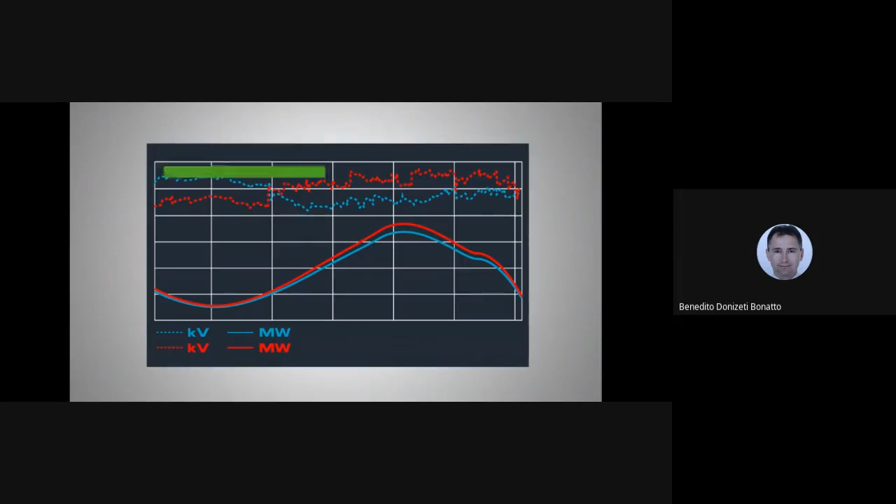The loss reduction improvements from VVO were small but valuable. Analytical simulations were performed using modeling, and simulation analysis determined that there is a potential for a loss reduction for the peak hours at most substations. A number of EPRI Smart Grid demonstration projects focused on technologies that exist on the customer side of the meter.

ESB Networks conducted a customer behavior trial to gauge the potential for smart meter-enabled treatments, including time-of-use prices and energy information services, to change customer energy consumption and peak demand usage. The time-of-use rates, energy information services, and financial incentives were found to reduce overall electricity usage by 2.5% and peak usage by 8.8% for the one-year period of the trial.

Another area of critical importance for the smart grid that has been studied in the program is cybersecurity. Smart grid technologies are introducing millions of new intelligent components to the electric grid that communicate in much more advanced ways than in the past. Cybersecurity is exceptionally important because the bidirectional communication and the control capabilities in the smart grid enable an array of new functionalities and applications. EPRI is providing guidance to utilities on developing an overall cybersecurity strategy, developing a risk assessment and management process, and selecting and tailoring cybersecurity requirements for the electric sector.

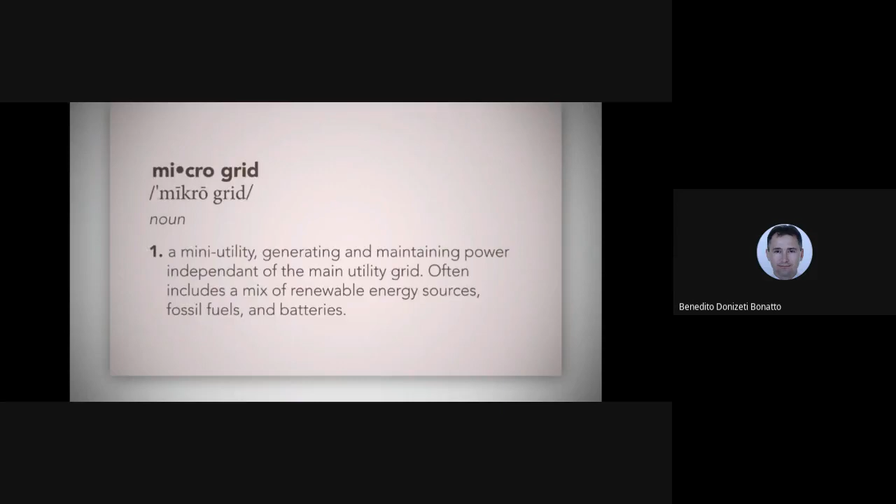Smart Sacramento projects also include energy storage, electric vehicles, customer service initiatives, demand response, renewable energy, and microgrids. Smart grid technologies allow SMUD to manage these distributed energy resources from a central point, a virtual power plant. New terms are entering our vocabulary like demand response and microgrid. Demand response programs enable customers to voluntarily reduce their electricity use during times of peak demand or emergencies. A microgrid acts like a mini utility, generating electricity and maintaining power independent of the main utility grid during outages. Microgrids often include a mix of renewable energy sources, fossil fuels, and batteries.

Smart grid technologies allow SMUD to manage these resources so that they work together, making the grid more reliable, while giving our customers tools to make better informed decisions about their electricity use, while helping to protect the environment through better use of resources. SMUD has been at the forefront of change in the utility industry for more than 6 decades. As the energy landscape shifts, SMUD continues to meet the ever-changing needs of its customers while leading the way to a renewable energy future. You and SMUD, powering forward together. For more information, visit smud.org.

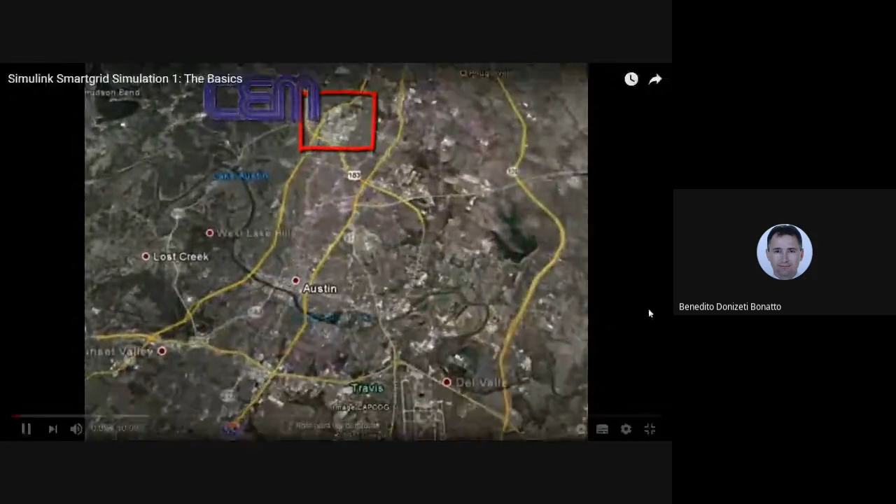Welcome to Austin, home to the Center for Electromechanics of the University of Texas at Austin, and home to the Pecan Street Project, a City of Austin smart grid demonstration initiative. This is the new Mueller community in Austin, where said smart grid is currently being implemented. The rest of this video will show you how Simulink may serve as the modeling platform for the researchers involved.

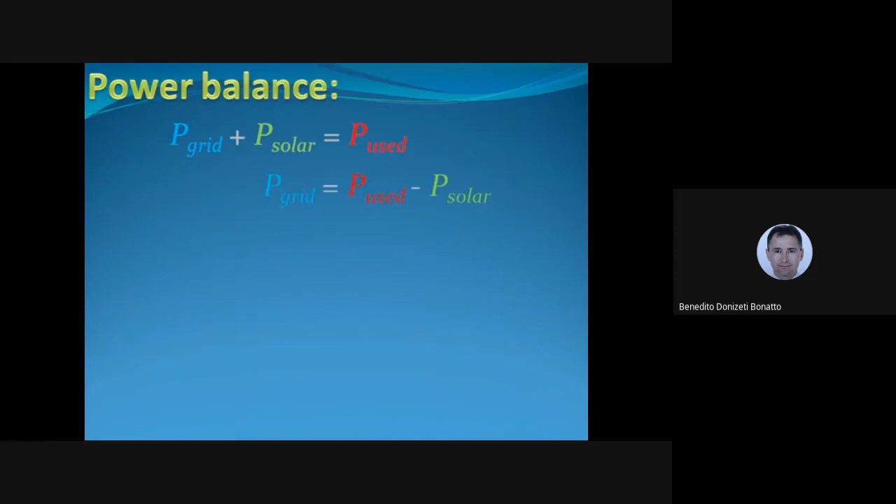The power used by homes comes from either of 2 sources, the utility grid or roof-mounted solar panels. The relationship between these sources and a home's consumption can be described as shown here. The Pecan Street project is currently measuring this field data. Here's an example that shows what these measurements look like for a 24-hour time span.

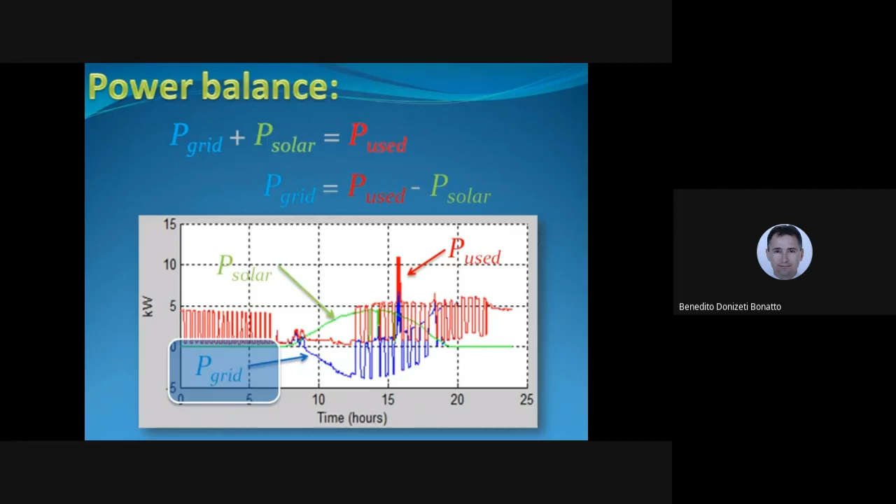What is currently of interest is the impact that variable solar generation together with home consumption have on the utility grid. Therefore, the immediate simulation focus will be on the utility grid power demand and its direction. As shown here with the blue trace, the grid power can go back and forth between positive and negative. This means that homes are capable of being self-sufficient and of injecting power back into the grid.

Referring back to Mueller, let's say we have a substation transformer, a cable here, a residential transformer here, one neighborhood here, another one here, and the rest of the system. Let's see how we can model this baseline system using Simulink. This is a simple Simulink model that can be used to simulate a few homes at Mueller. The first thing that should be noticed is that the simulation time must be entered in units of seconds. Therefore, to simulate 24 hours, one must enter 86,400 seconds.

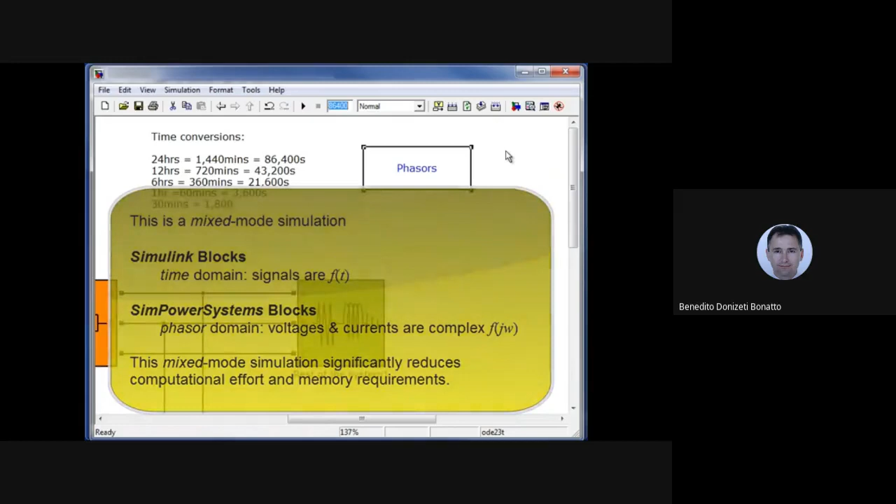The reason we choose a phasor type of simulation is because to simulate 24 hours of data, this will only take a few minutes. If we would have chosen a time domain simulation to simulate 24 hours of data, not only would we deplete our computer memory and storage, but it would also take several hours to conduct the simulation.

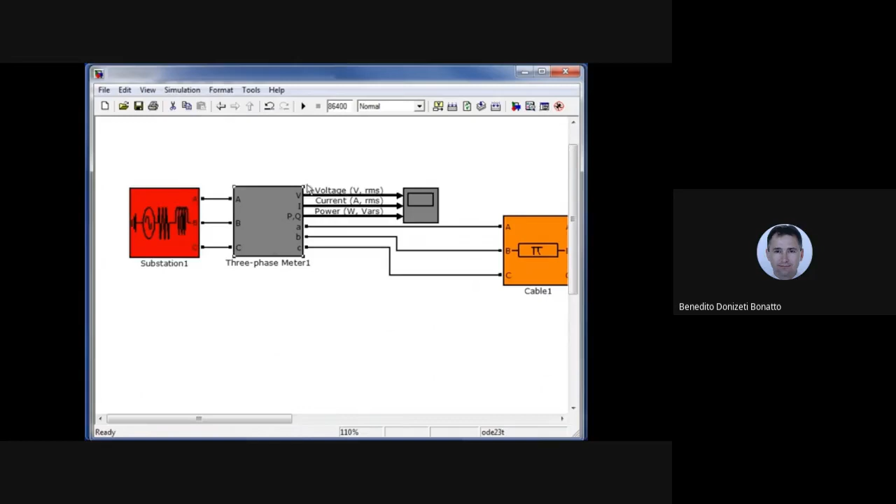Let's go over each one of the blocks shown here. On the left, we have an ideal source. This ideal source is supposed to represent the output of the substation transformer at a given voltage and frequency. This is a meter that is placed here to measure three-phase voltage, current, and power. The results or the output of this meter will be sent to this scope shown here.

This is a cable block. This is taken from the SimPowerSystems library, and it is a three-phase pi section line used as a cable here. The frequency and length can be specified or changed. The rest of the system is modeled as a simple static load where the terminal voltage is specified as well as a desired or intended power consumption.

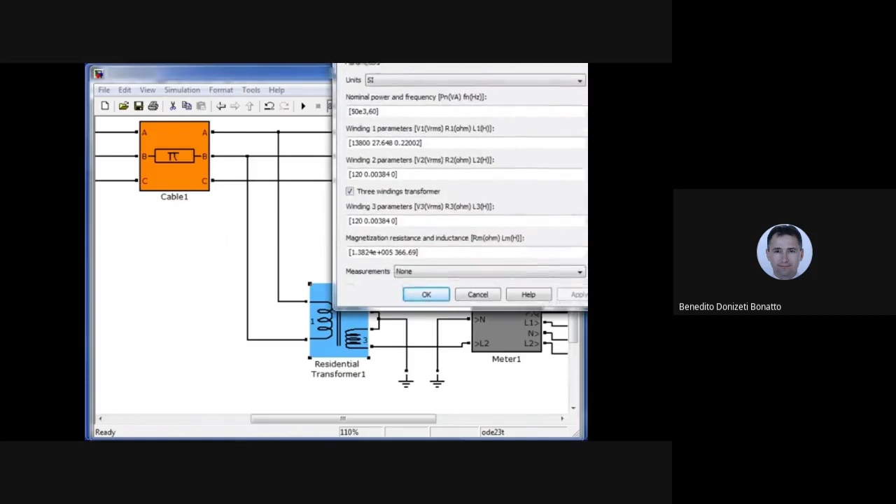This is a residential transformer. The transformer currently is set to be 50 kVA, but this can be changed at any time. The secondary side voltage is set to 120 volts, the primary to 13.8 kilovolts. These numbers can change at any time.

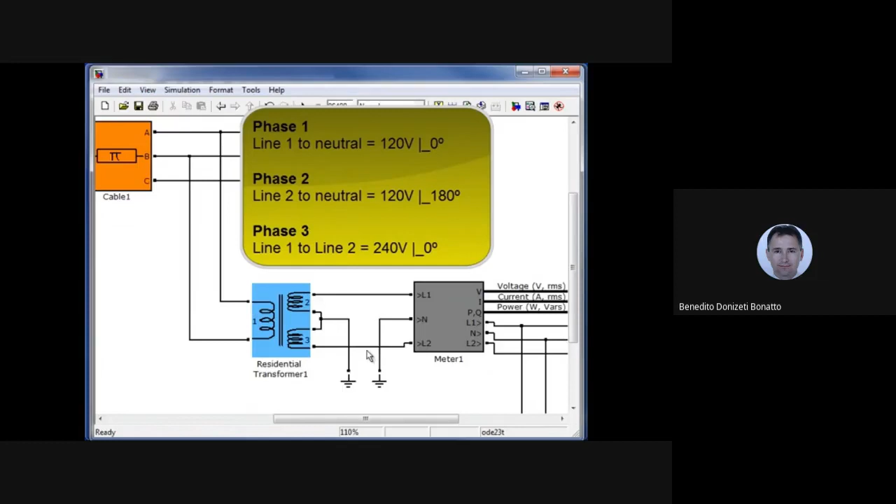The secondary part of the transformer is center tapped. This means that there's a phase that goes from line 1 to neutral or ground, and a second phase that goes from line 2 also to neutral or ground. The third phase is between line 1 and line 2, and this is 240 volts. This is another meter that is purposely placed downstream of the transformer to observe the transformer throughput. The transformer throughput will be displayed on this scope shown here.

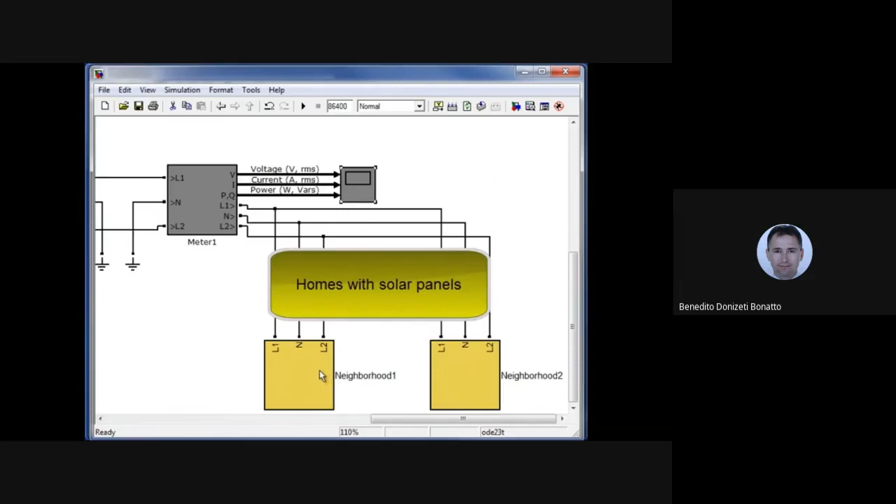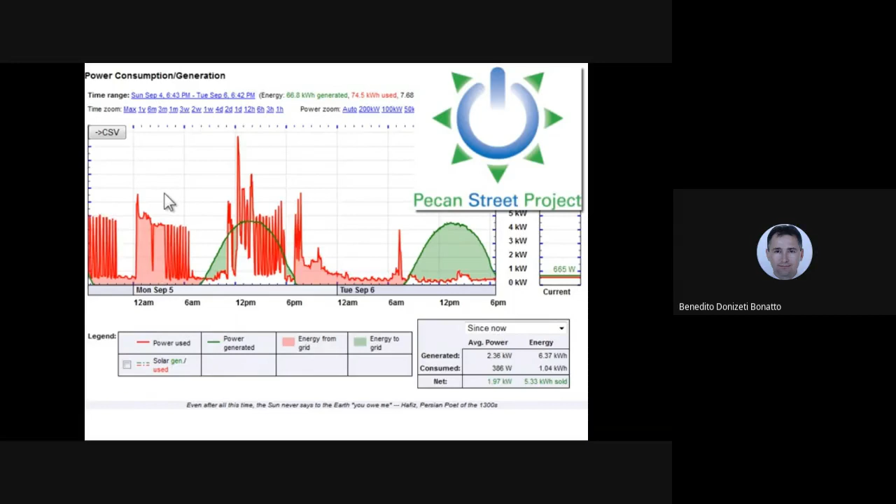These are groups of homes called neighborhoods. Let's look inside neighborhood 1. Neighborhood 1 consists of 5 homes, homes 1 through 5. Each home is modeled as a load profile. The data that drives each home comes from this source block shown here. The data that enters this source block comes from the eGauge website. The data from the eGauge website has solar information as well as house consumption information. This data can be exported in intervals of 1 minute.

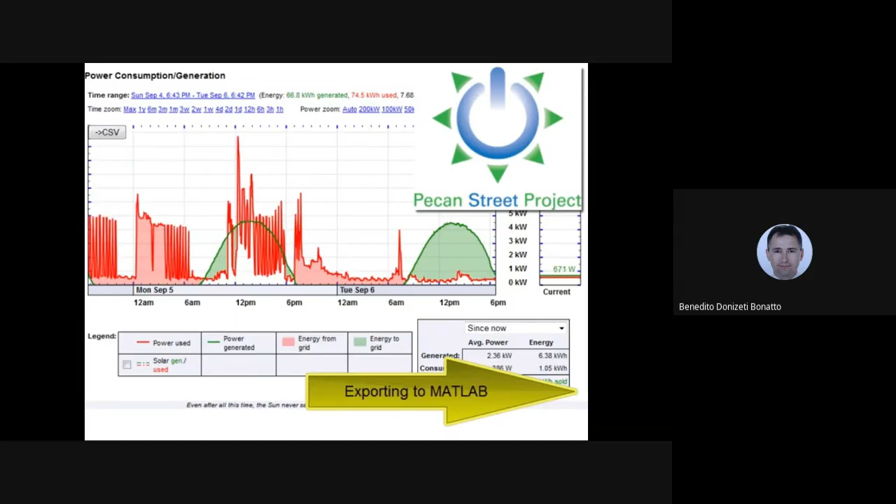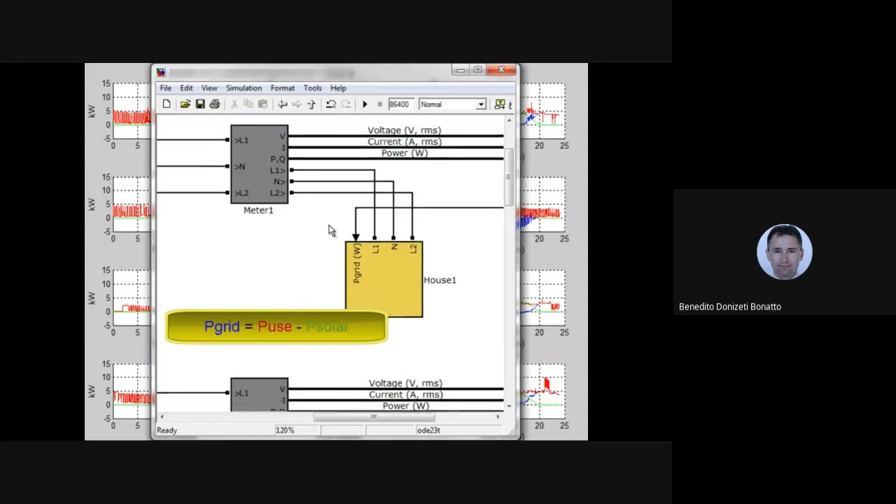Once the data is exported, it can be made available in MATLAB. Here we show data for houses 1 through 12. The data available in MATLAB enters the house from this source block. It should be noted that the data that drives the house is the power that is seen from the grid looking into the service panel. This accounts for the solar generation at each house as well as the consumption of each house. If energy storage is desired at the residential side of the meter, it can be placed at this point here.

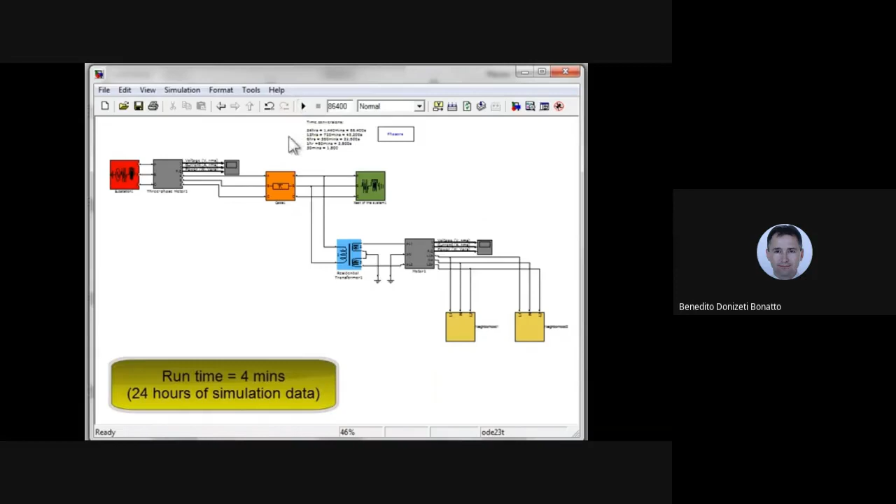This neighborhood shows 5 homes. Neighborhood 2 also shows 5 homes. The data for each house is different. Let's run this model and see what the simulation results look like. After the simulation completes, one can look at the throughput through the transformer. This data shows a 240 volt phasor and two 120 volt phasors, the currents through the transformer as well as the power through the transformer.

One can also look at the data going into each house. Let's look at this scope, for example. For house 1, we have the 240 volt phasor, two 120 volt phasors, the current, and the power. Let's look at house 2. House 2 also shows the voltage phasors, the current phasors, and the power consumption as seen from the grid.

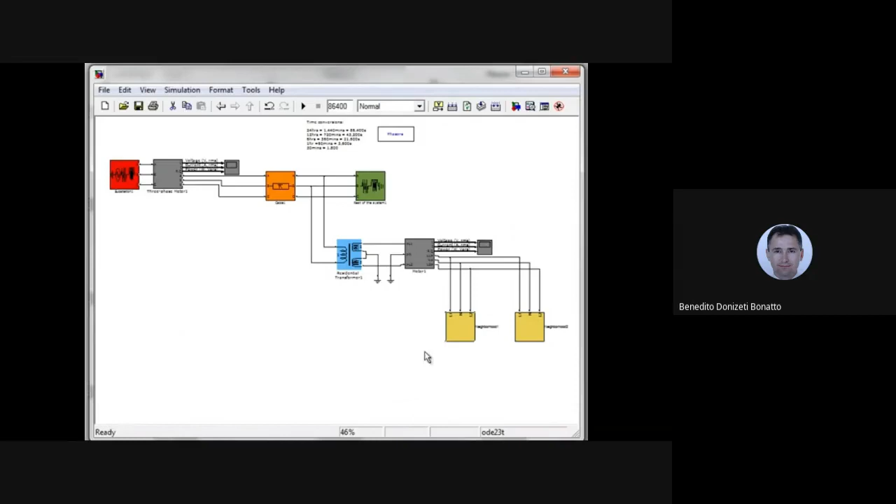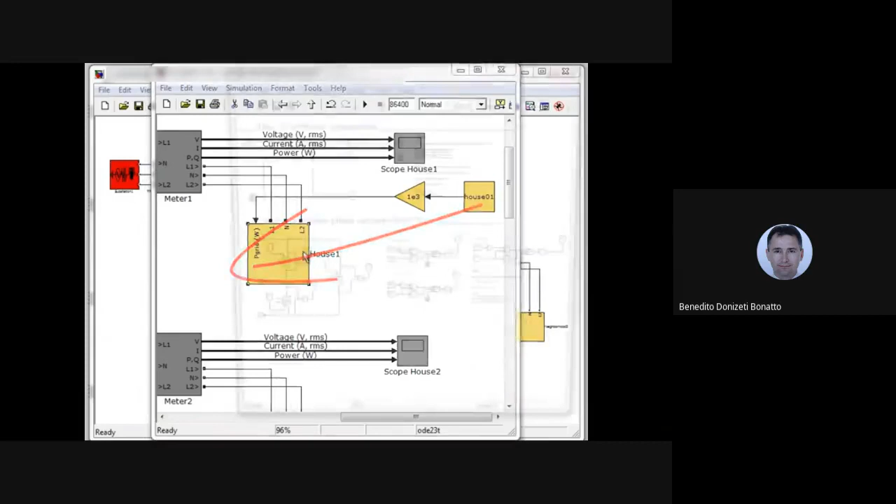Having explained how this model works, let's look inside a house and see how that works. If, for instance, we look at house 1 and we understand that the power is driving this house, we must distribute this power into the power consumption in each phase. So step 1 will be power distribution, which means taking that house power and distributing it to each phase, to the 120 volt loads and to the 240 volt loads. At this time, a random variable is used to create a random distribution.

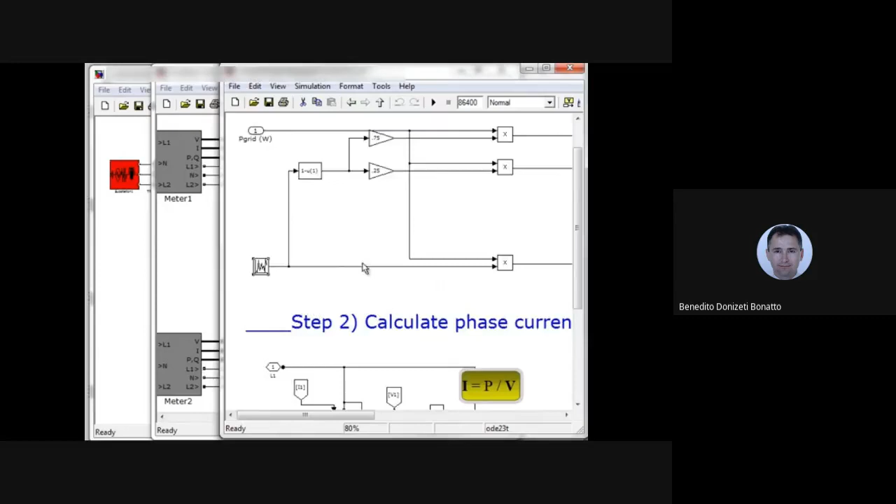The second part of this model computes the current in each phase as a function of the power profile and the simulation voltage. Once the current for each phase is computed, it is used to consume power from the grid. 3 current sources are shown here, one for each phase. The currents are computed on the right using the profile power and the simulation voltages. Each house has the same model but is driven with different data. An interesting point is that if one desires to integrate renewable energy or storage at the distribution level, one can use these 3 lines here or here.

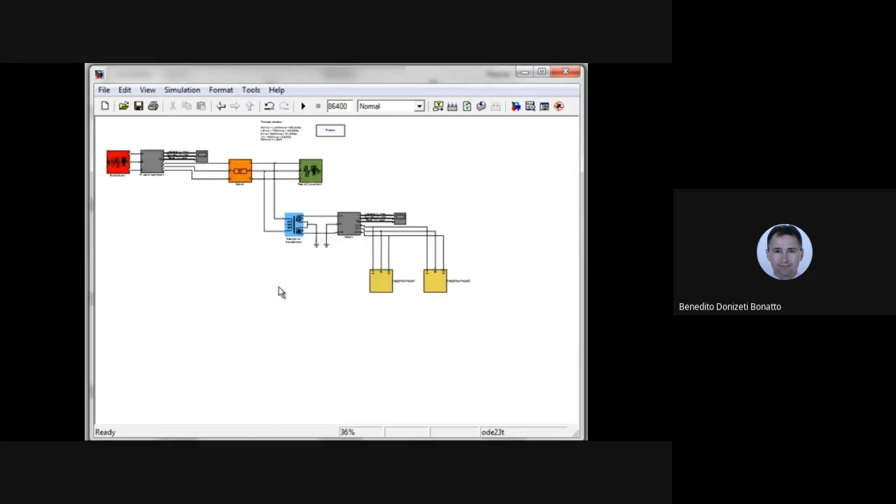Additionally, one advantage of using Simulink is that the model can easily grow. By simply selecting the region of interest, one can drag and drag again to make the system grow. Again, drag, and this system is now 6 times larger than it was originally in just a matter of seconds. If one uses the Explorer, one can see the neighborhoods and quickly access the homes.

This completes the demonstration video that shows that Simulink may be able to serve as a simulation platform for the

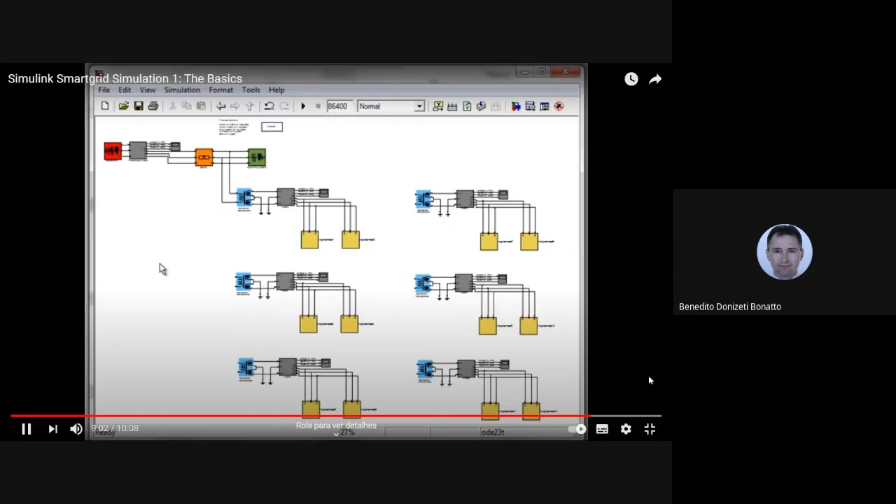simulation requirements at Miller. If you have any questions or any feedback, please email me at the address shown.

At this point, Simulink is being used as an experimental simulation platform. It is possible that we may reach the program's limits in the near future, and for this we've asked that you as researchers assist in making this simulation as complex as possible in hopes that we may reach or understand what the limitations of Simulink are. Thank you very much.

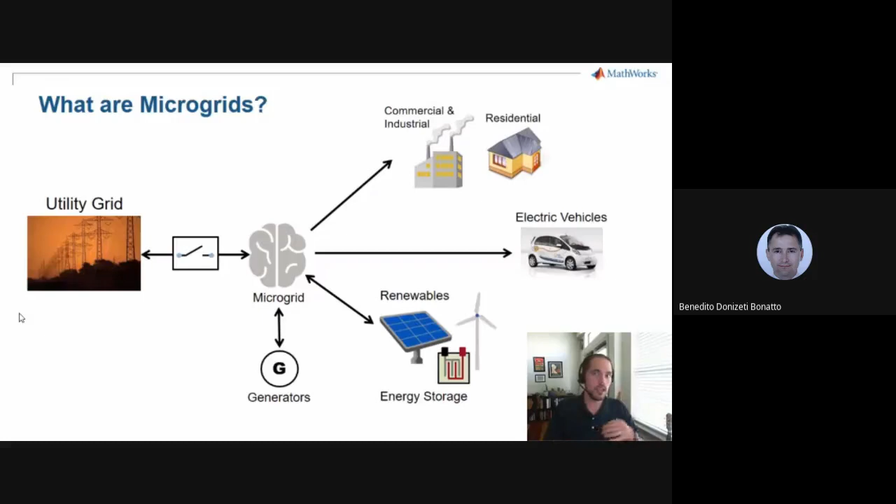And so that's the focus of this video series. We're gonna go from design all the way to integration studies. Here's just a list of the topics - we're gonna cover them video by video, but feel free to join in whatever order you want, though we're going to try to go linearly as we film these. I look forward to having you all here along for the journey. Thanks.

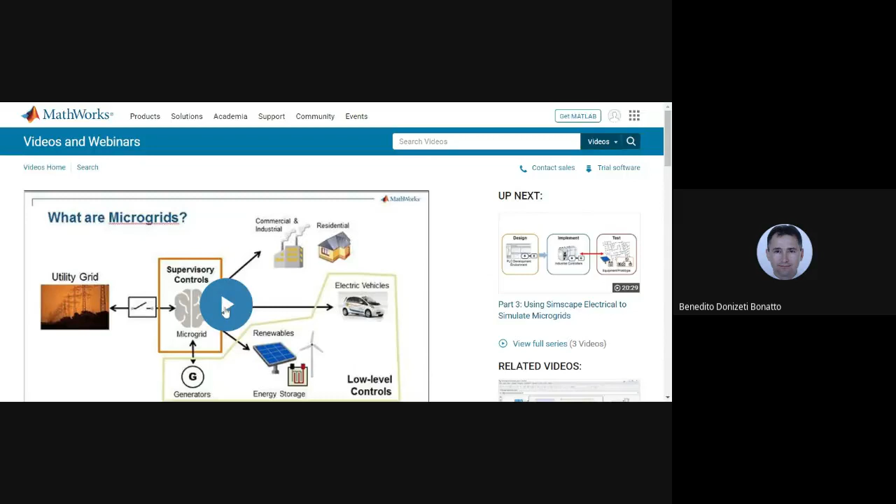Welcome back to our series on microgrid applications and distributed power systems. My name is Jonathan Lesage, and I'm an application engineer with MathWorks. Today we're going to look more into modeling and simulation with MathWorks tools, especially focused on microgrid applications and renewable energy. We're going to take a look at what it takes to model these systems, all the way to deploying them out to a hardware-in-the-loop setup so we can do some rigorous testing of a controller under test before we take it out into the field and perform grid integration.

We're going to cover a lot of topics in this series on microgrid applications, distributed power systems, and renewables. Many of these will focus on common grid-related tasks, such as how do you address model validation requirements for equipment, or how do you test grid codes. Ultimately, we want to use models that we build to perform grid integration studies and validate these pieces of hardware that will end up in the field.

To quickly recap for those just joining us, a microgrid is a distributed power system that has distributed energy resources, effectively multiple sources of power generation. These can range from traditional sources like diesel, natural gas, and combined heat and power, to more renewable sources such as solar, wind, and even energy storage systems like batteries or flywheels. The microgrid also has the capability to island itself, disconnecting from the main utility grid. This allows it to continue operating even if the main grid goes down, which increases the microgrid's reliability. Finally, there's the concept of the microgrid controller.

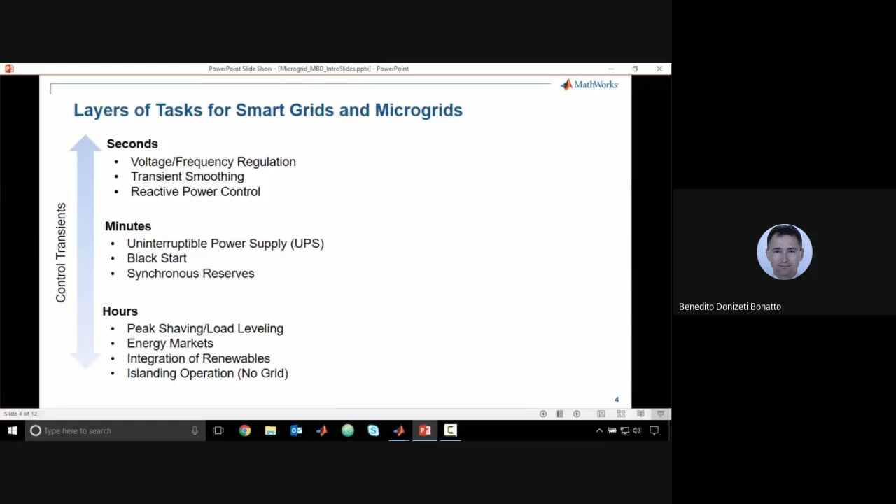And ensure that once we integrate with the main grid, everything operates as expected. For this series, we'll focus on two particular control tasks. The first is peak shaving. Peak shaving occurs when we've set a maximum load that we expect to draw from a utility, and if we exceed that, we make up the difference with our distributed energy resources, be it a diesel generator or an energy storage system.

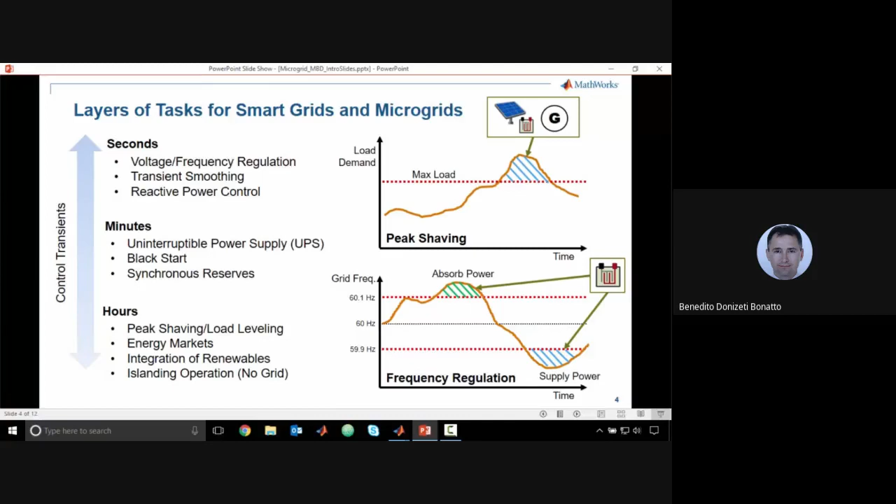The other control task we'll look at is frequency regulation. AC grids have a nominal frequency at which they operate, be it 60 Hertz or 50 Hertz. As we drift away from this nominal frequency, we need to absorb or inject power to bring us closer to that, especially if we drift outside of some tolerance.

Traditionally, to build a system like a microgrid controller, we'd have to implement these control strategies in a development environment by hand. Once done, we'd need to come up with test vectors to ensure we've properly tested all different operational scenarios. From here, we can deploy this onto actual industrial control hardware and start to interface with hardware to test.

Equipment-based testing is often risky, as it involves scheduling downtime and is prone to failure because we're testing new algorithms on actual hardware. An alternative approach is to replace a lot of this equipment-based testing with a digital simulation of the actual grid. This lets us do as much upfront testing with our control hardware as possible before getting out into the field and testing with real equipment.

With MathWorks tools, you can take desktop simulations that you've already put together of your microgrids and renewable applications and reuse those for real time. This involves taking the model and using Simulink's C-code generation capability to create a real-time target that you can deploy to real-time hardware, such as the Speedgoat.

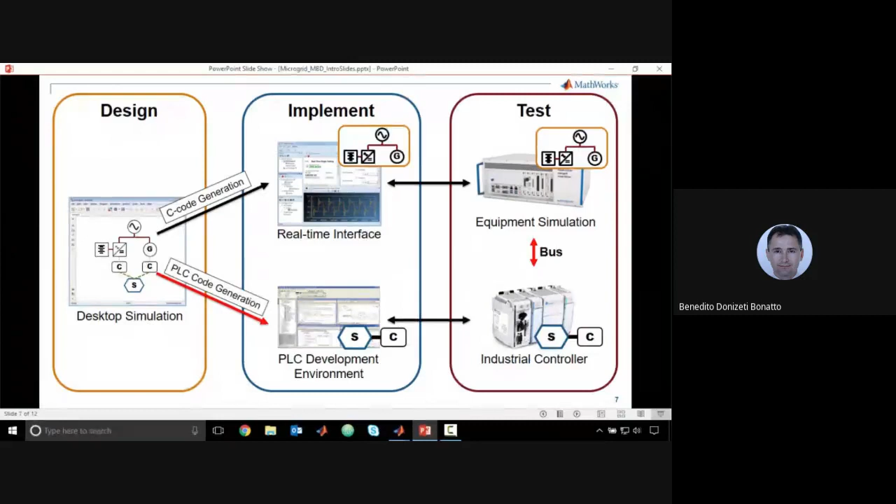Additionally, if you have control algorithms that you've tested in Simulink and you want to use those out in the field, you can do C-code or even PLC code generation and deploy these directly into your development environment and integrate them with other algorithms that you've already created.

Now let's look at a detailed example of how we can use desktop simulation to start validating and testing microgrid control strategies. In this case, we're going to look at peak shaving.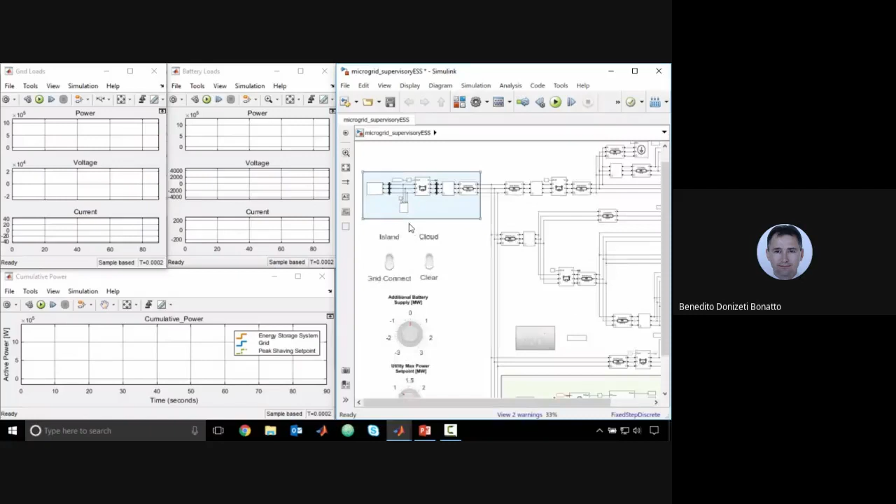This is Simulink, a block diagram-based dynamic simulation environment where we can schematically build up simulations of systems like microgrids and renewable energy resources. In this particular case, I put together a microgrid example, and this microgrid is actually grid interconnected. So this is our connection to the grid here.

We have blocks that can inject faults, and then we can look here. This is our distribution feeders down to the distributed loads, including distributed energy resources such as PV arrays. And then down here, we'll notice we have a grid-connected battery, or an energy storage system, which is actually what's going to be conducting the peak shaving in this case.

To run this dynamic simulation, I'm going to go ahead and push play. Now, running these simulations lets us inject all sorts of scenarios.

We can inject faults, we can test the controller over all sorts of operational ranges, and this gives us more confidence purely on the desktop side of things.

So in this case, over on the left, we can see the outputs of this particular simulation. This bottom plot is showing us the cumulative power demand. Right now, the utility grid is making up all the power requirements of this microgrid. But as we approach this peak shaving set point, we should hopefully see the energy storage system kick on to make up the difference once we exceed that. And we see that that's starting to occur. These top plots show more at a dynamic or electromagnetic transient level the current output in three-phase AC waveforms.

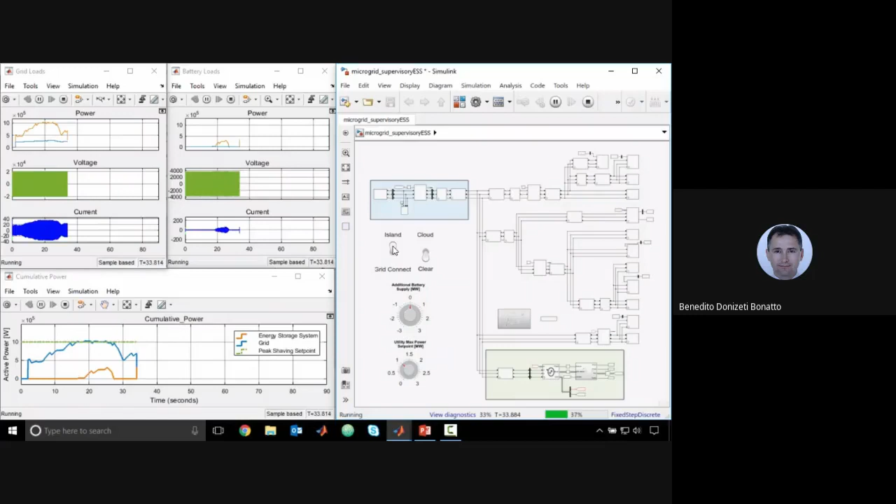Now, if I want to issue a command to island this microgrid, for example if there's a fault on the utility grid, we can issue that command to the control system and see how we react. As we issue that command, we see the demand or power output of the energy storage system go up, and ultimately we see the current draw from the utility grid go to zero, with the energy storage system making up the full difference.

If we issue the command to reconnect to the grid, we should ultimately see us reconnect and throw that breaker up there to reconnect. This requires grid resynchronization.

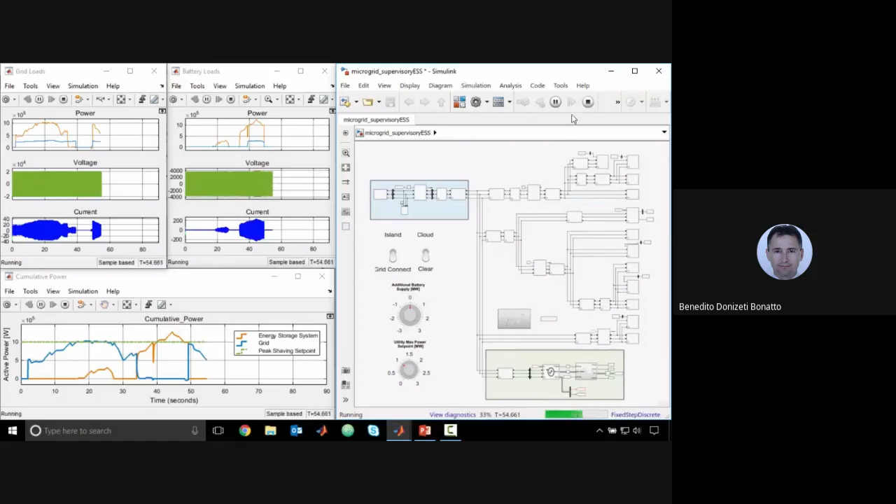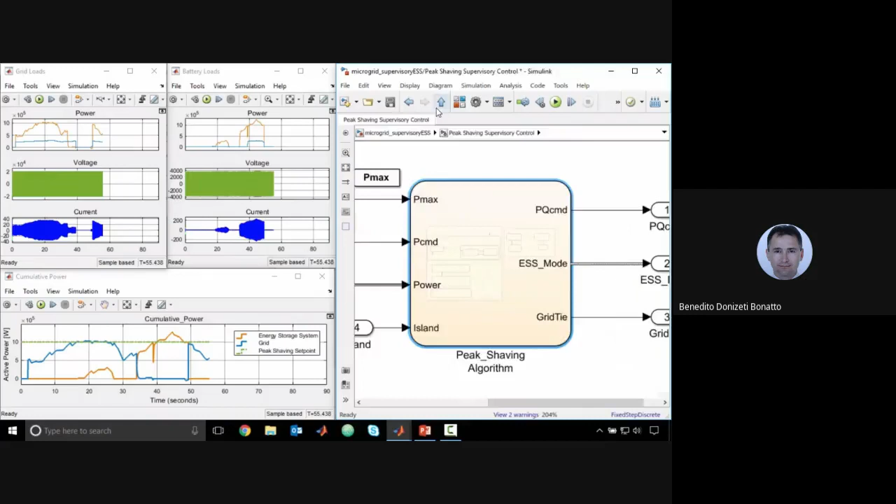Now let's take a closer look at the controls of this. If I go into the controls block here, we'll see the peak shaving algorithm, and this is using a tool called Stateflow. Stateflow, let me open the chart here, is a way to schematically represent state-based diagrams or controls of a system.

If I rerun this simulation again, we can see what state we're currently in. We'll start out in grid connected, and as we run this simulation, we can inject the failure scenarios or island the command and see what kind of states we go into. As I issue the command to island, we're in islanded state. And as I issue the command to reconnect, we see we're synchronizing with the main grid, and after synchronization, we reconnect.

These type of controls that we design in tools like Stateflow or Simulink are not locked into this environment, as I've mentioned before. We can actually deploy these out using tools like Simulink PLC Coder or C code generation to take them out into actual industrial control systems.

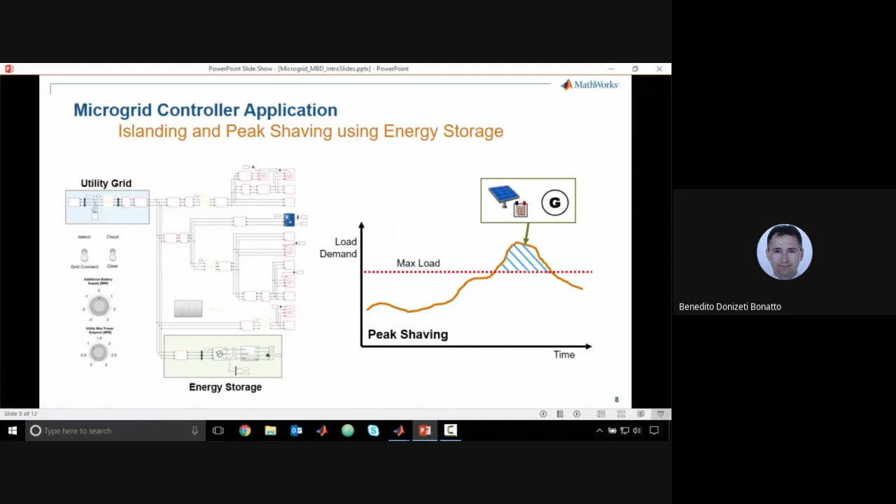Using desktop simulation, we can design, test, and size equipment and control systems for our applications. But once we're done with desktop simulation, we're going to have to start working with hardware. So we've covered desktop simulation, that's where we have a full simulation of both the plant and the controllers.

Once we start working with hardware, we need to migrate to a different strategy, something like hardware in the loop or controller hardware in the loop. That's where we have our controls implemented on an actual piece of industrial equipment, but we don't want to necessarily start testing with real high-powered power electronics.

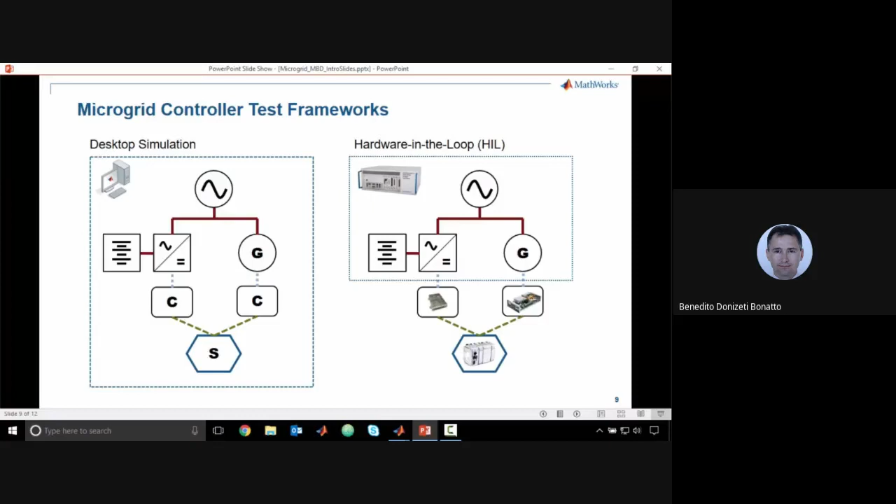So for hardware in the loop simulation, we take the desktop simulation we've already built and tested and then deploy it to a real-time platform, such as a Speedgoat. On the flip side, we start using the actual control hardware and interface with that directly through whatever industrial protocol we're using, such as Modbus or EtherNet/IP or whatnot.

To leverage the microgrid model we've already put together for desktop simulation, we can make a few changes to get it ready for hardware in the loop testing. Really, these involve removing the controller model from the simulation. The controller will no longer be simulated, but will actually be on embedded control hardware.

From here, we can just replace that with the industrial protocols or I/O that we're going to actually be working with. This could be Modbus, this could be analog or digital I/O. From here, we can use C code generation and use this build button. That will deploy it to a Speedgoat or a real-time platform, and from there, we can perform hardware in the loop testing.

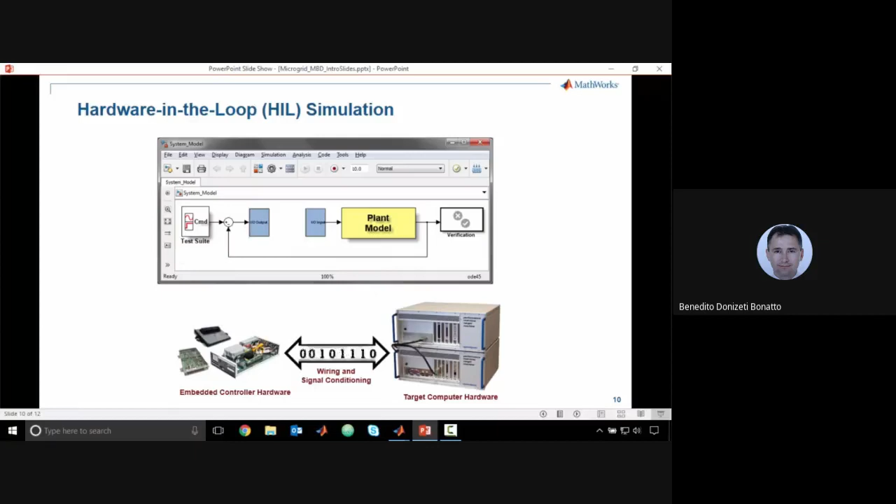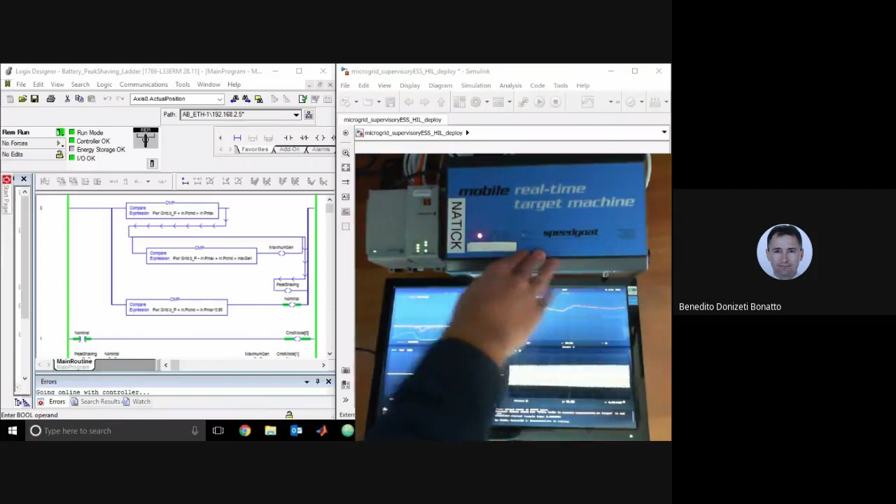Now that we've seen how we can take a desktop simulation to real-time, let's take a look at our example microgrid application on a real-time system. So down here on my webcam, I have a Speedgoat system that has our microgrid running on it in real time. This Speedgoat is communicating back and forth over EtherNet/IP, which is an industrial protocol, to our PLC here.

This PLC has our peak shaving algorithm and other low-level control algorithms running on it. And so it's communicating back and forth. So this PLC is kind of a controller under test that we want to test under all operational scenarios before taking it out into the field.

I also have a digital scope here that lets me look at low-level signals on our real-time system. So starting over here, I have the three-phase AC waveform from the grid, and we can see how that changes over time as our power demand changes. In this scope, I have the three-phase AC waveform from our energy storage system. So as peak shaving kicks on and off, we'll see this raise and lower.

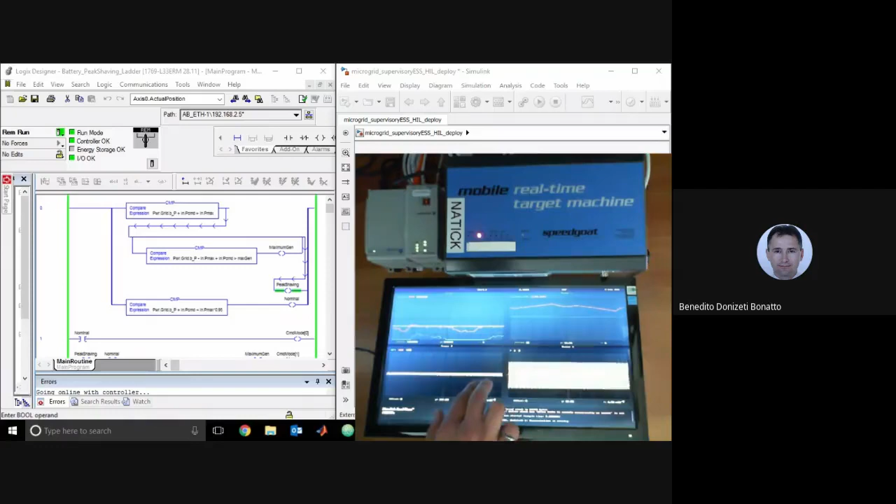This plot up here shows a similar thing with this blue line representing the power out of the energy storage system, the red line representing the power out of the grid, and this yellow line representing our peak shaving set point or threshold. So when we're above this, you'll notice that the energy storage system kicks on. This final scope just has a couple of other measurements, such as battery state of charge, and then our PV power output. So as the irradiance changes, we can observe that.

So back to my screen. I'm actually connected up to that PLC so we can take a look at it as it's running. And so this is a tool called Studio 5000. This is a tool that you use to program Allen Bradley PLCs. And we've put together a ladder diagram that actually controls this system. So this is one way of programming these industrial systems.

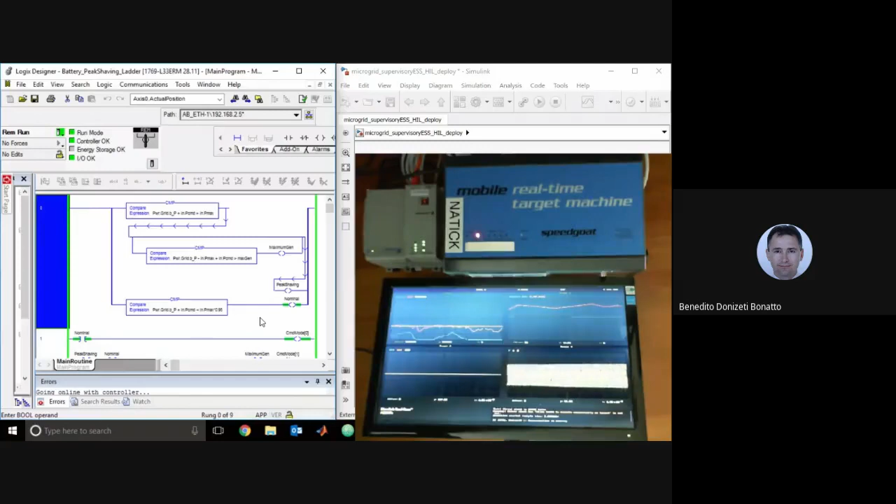If I scroll down, another thing we'll notice here is we have a more detailed block here called peak shaving algo. Now this is an example of how you can take an algorithm that we've developed in Simulink and then deploy it out to another system. We'll cover this later, but this is an add-on instruction that was generated from Simulink using Simulink PLC Coder.

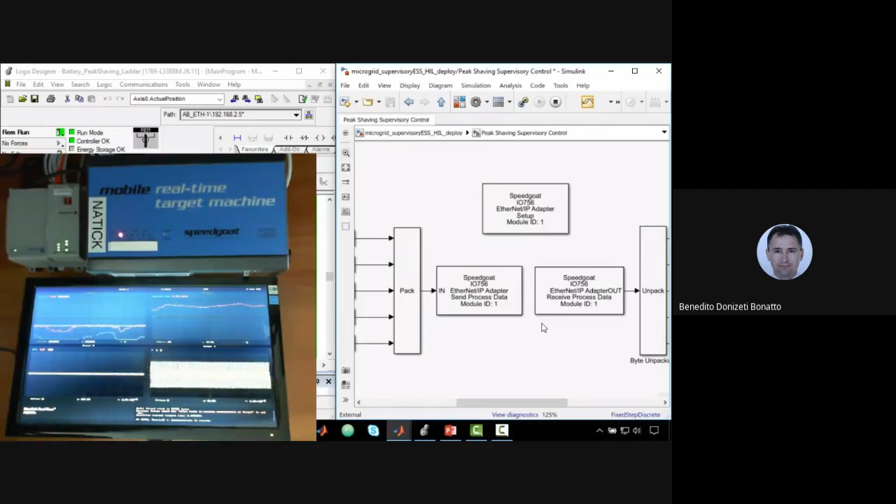Now, the main difference that we've discussed in our desktop simulation versus real-time simulation is just interfacing with the hardware itself. And so in this particular case, the hardware interface replaced the Stateflow diagram that we put together. If I go into this supervisory control block, we'll see I've replaced that Stateflow diagram with these Speedgoat driver blocks. And these driver blocks are letting us communicate over EtherNet/IP. This is where you would choose whatever protocol you're using, make that selection and wire the schematic up.

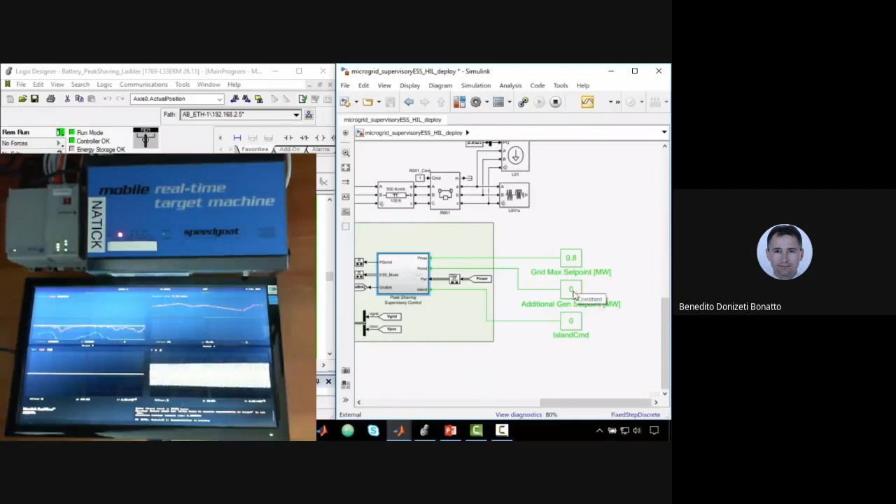Now, the last thing we're going to do is take a look at how we can issue commands to the real-time simulation. Simulink Real-Time has a capability called external mode, which lets us stay connected to the digital simulation and interact with it over basically an Ethernet communication. And so if I want to go ahead and island this grid, I can issue a command here on my Simulink diagram. Just go ahead and change that to 1.

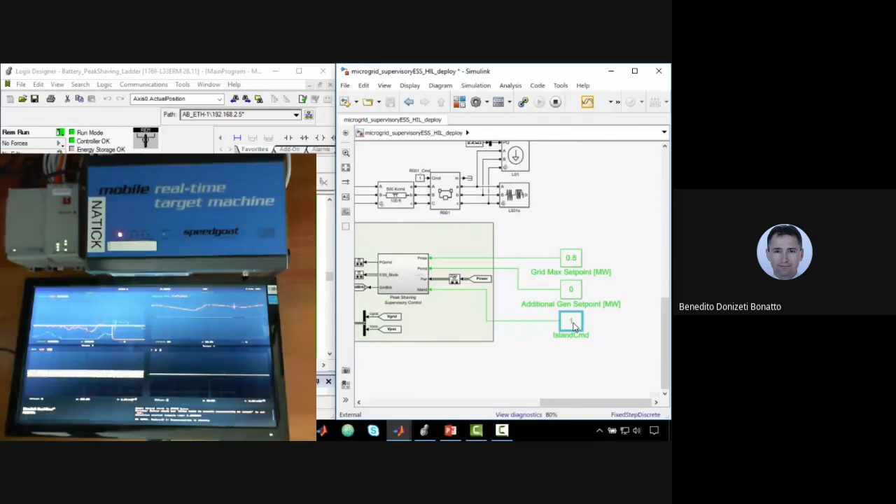And we'll notice down here on our scope that after I issued that command, the grid power here went to 0, and we've made up the difference using our energy storage system. We can confirm that up here on our power plot. Now, if we want to resynchronize, it's just a matter of making that change here on our schematic. That'll issue the command to the PLC, and we'll see after a slight delay, we've actually reconnected. That slight delay comes from the fact that we're doing grid resynchronization before we throw the grid breaker.

Now, to quickly recap, we've seen how we can build models of microgrids and renewable systems using Simulink and Simscape Electrical power systems. These tools let us do all sorts of desktop simulations and testing of these systems. And we're going to see more of that as this series goes on, including looking at grid codes and designing energy management systems. Ultimately, we were able to take this system to real time and test it with an actual industrial control system. These are some of the additional topics we're going to cover in coming videos.

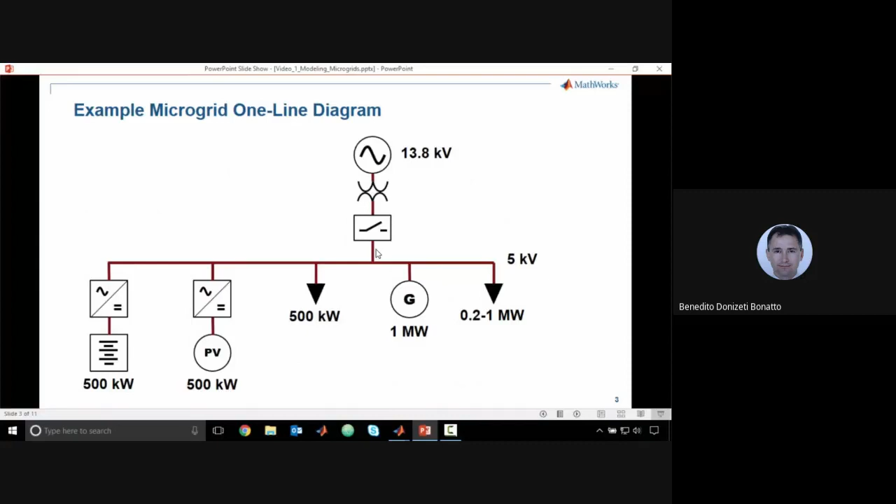Simulink and Simscape power systems are a block diagram-based modeling language. So to reconstruct this one-line diagram in Simulink, what we would do is we would just drag and drop the components that represent each particular system of interest, be it the grid or the loads or the distributed energy resources.

Simulink's also a hierarchical modeling approach, which means that underneath each of these particular blocks, such as this energy storage system, we could have complex controls and more detailed modeling that wouldn't necessarily be visible at the top layer. This helps keep your schematics clean. Let's take a look at how we can start to build these systems up from scratch.

All right, since MATLAB's our foundational tool, let's hop over to MATLAB and see how we can get started. So since we're going to be working with Simulink, really what we need to do is launch Simulink from MATLAB. So we just hit this button up here, that launches Simulink. This is the Simulink start page. This basically has templates that we can use for different models, but I'm going to start from the very basics, so from a blank model here.

Now, when you start up a blank Simulink model, it's an empty canvas. This canvas is where you drag and drop the components that represent your system. Now, if we go to the top up here, the Simulink library, you'll notice that the basic Simulink blocks are all block diagram traditional notation. So you have components like transfer functions, PID controllers.

If we go over to the discrete library here, you'll see components like filters and delays. And these are all components that naturally lend themselves to building control systems, so on the control side of things. If we want to build up something more on the plant or the microgrid side of things, we may want to start with a more schematic representation rather than building things up from the ground here. And so that's what the tool called Simscape is for.

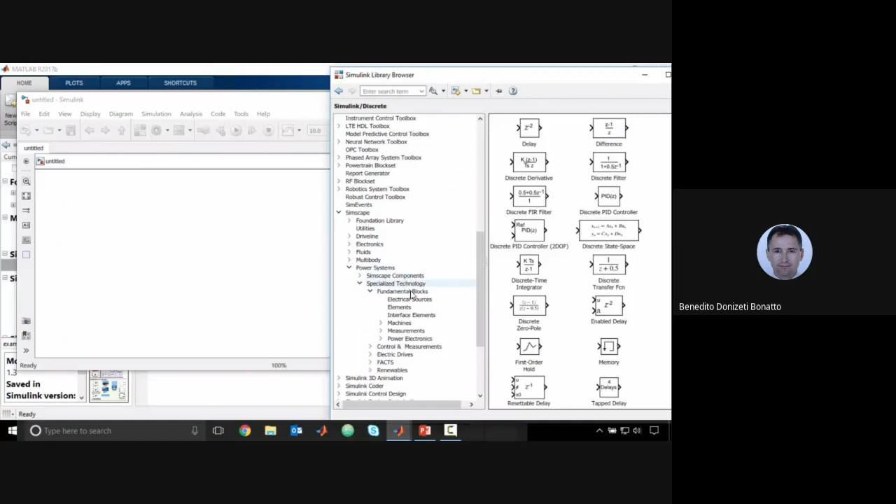Simscape has multiple domains and advanced libraries for each of these domains. But in our particular case, we're going to be sticking with power systems because we're working on microgrid and distributed energy applications. So if we wanted to start building a simple microgrid, we can come in and start dragging and dropping these components out to schematically represent that system. So for our grid, maybe we want to represent that as a three-phase source here to start.

And then now let's start adding loads. So I'll go into the elements here, and I'm going to grab a three-phase RLC here and just rotate that and connect it. And so this is our first microgrid we've built. It's very simple, nothing special here.

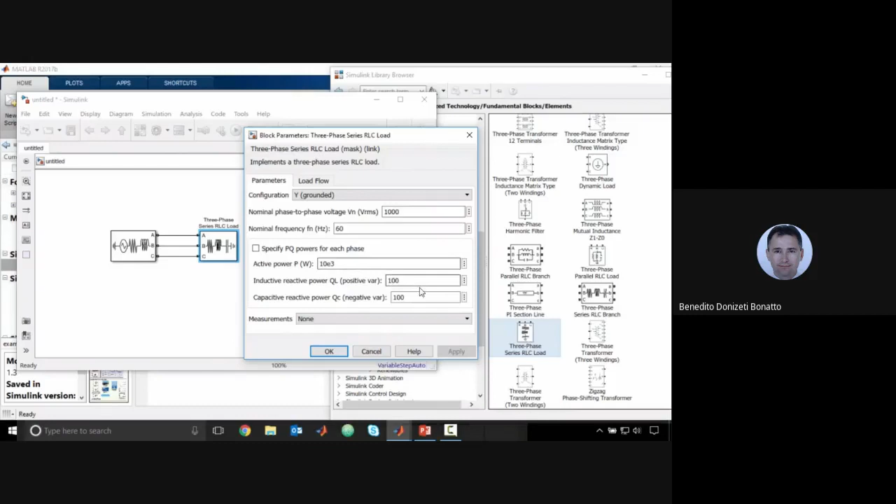If we want to start to parameterize this, we can double click on a block in Simulink and see the block parameters. And here's where we can specify the voltage on it, the active power of the static load, and other reactive power constraints as well. If we wanted to add another load, maybe something more dynamic, I'll just grab this three-phase dynamic load. We can add that to our little microgrid, connect it up, and now we have a slightly more complex model here.

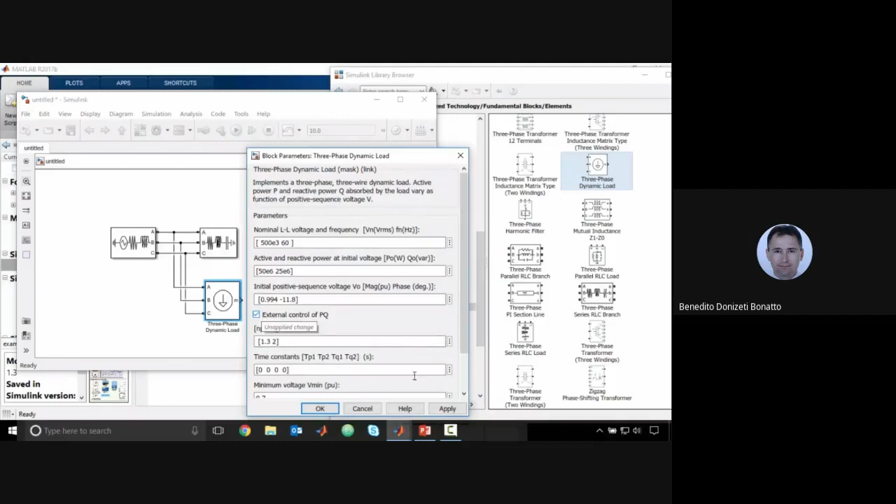Now the dynamic load by default has no input to it, but if we double click on it, we can actually check this box here and expose a port to allow external active and reactive power control over this load. And so what this does is this lets us increase the complexity of this model just a little bit more. Now we can feed in values of active and reactive power over time of this load, maybe historical data from some field measurements, and actually increase the fidelity of our model.

To further increase complexity or fidelity of a model, we can maybe add additional features like power electronics or controls. For a lot of distributed energy systems, we're going to have to add power electronics. And so we may need something like a bridge that converts from AC to DC. And so we can drag this in and connect this up.

Of course, when you have power electronics, now we have more complexity because we have a gate here. This gate is basically the switching signals to the power electronics. But over here, now we have a DC source. So we could add something like a solar array or a battery system. So just for example's sake, I'll grab a battery.

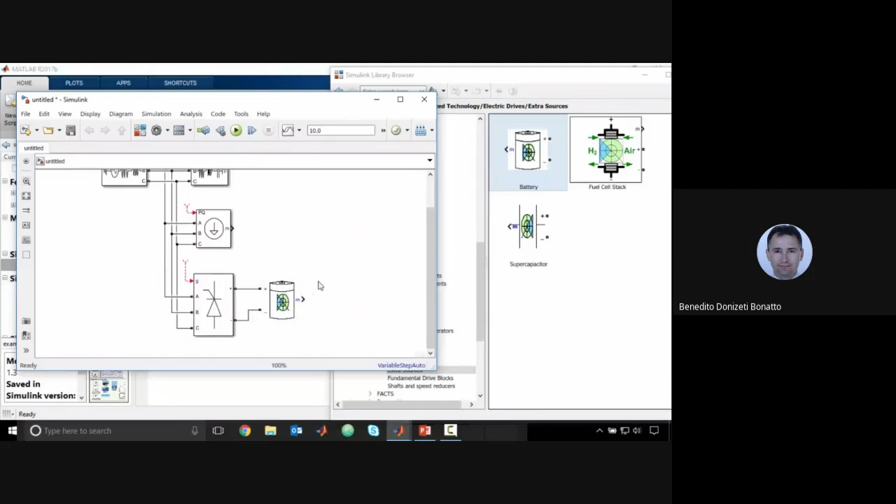Now, for those of you that have used Simscape Power Systems before, you'll notice that I'm missing one critical component, and that is the Power GUI block. For those of you that are new to the tool, this Power GUI block basically gives us additional controls outside of the base Simulink controls on our simulation. Because electrical simulations are special in the sense that we can have multiple different ways of simulating them, this will give us additional controls. We'll touch on this in a little bit later.

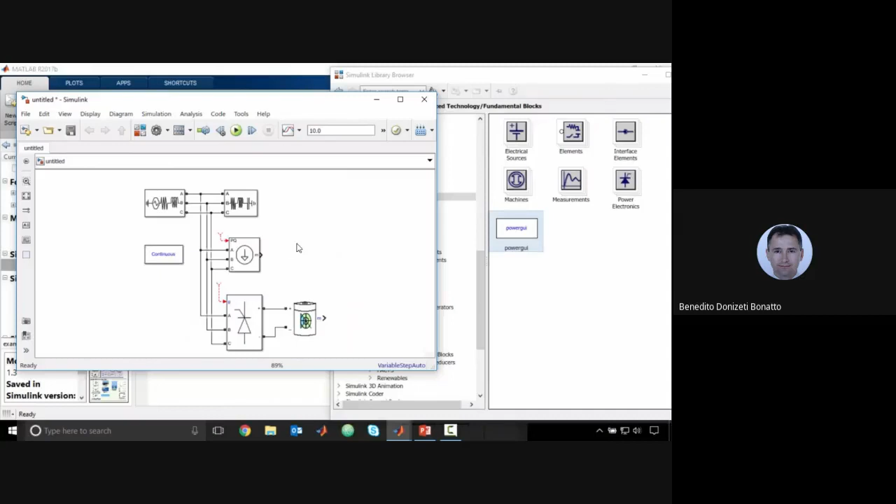The last thing I want to touch on is as we start to grow these simulations, we can group these together into what's called a subsystem. And now we're starting to build a hierarchical component of our system. So this could maybe be our ESS. And this can be a component that I can now share with my colleagues as I've built it up more and more. Rather than leaving this in just a model, I can also create libraries and share my components through libraries, kind of like these Simulink libraries that ship with the tool.

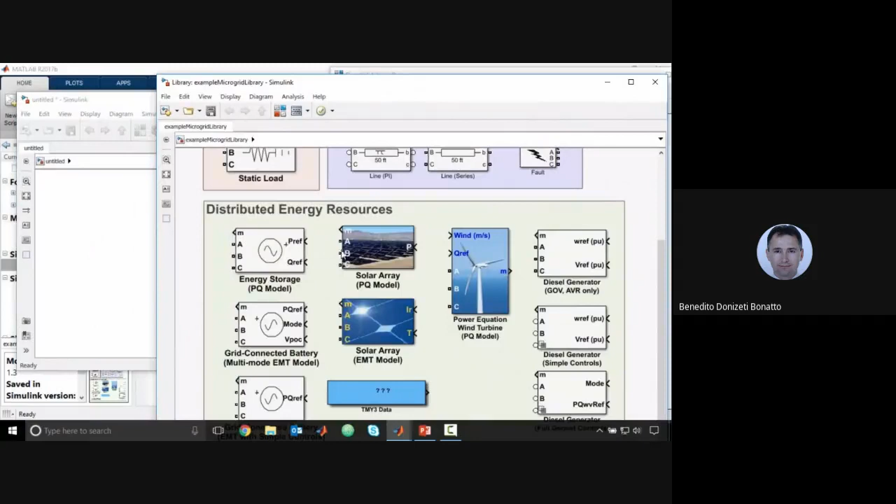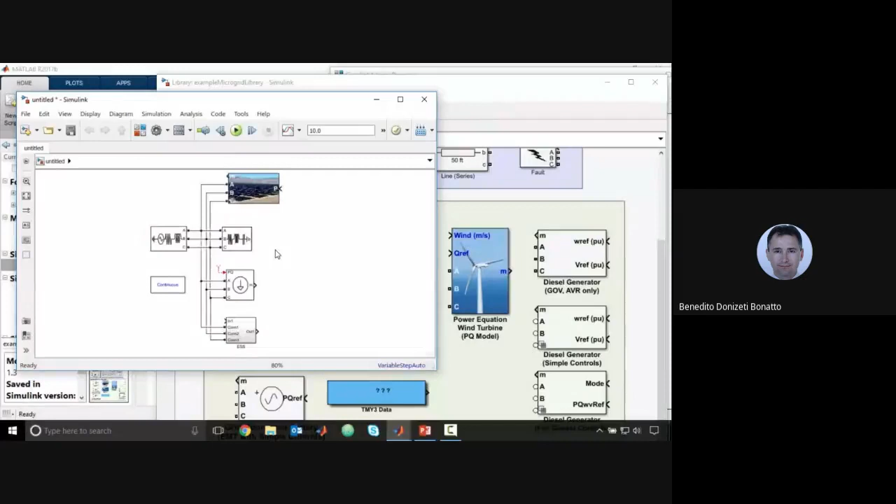The way I would do that is I could just say File, create a library, and let me actually open up a library that I've created with some microgrid components. So we've got pre-built components that I've put together using lower level blocks. And now I can drag these out to represent additional portions of our microgrid. So I can connect this up as I've connected everything else up. And so now we can see how we can start to hierarchically build up a system for desktop simulation.

So here's the simulation that I've put together. I'm going to go ahead and push play and simulate this system to the disturbances that we discussed. And on the scope, we can see the resulting outputs. So we can see the frequency disturbances that occurred due to islanding this microgrid, and then also due to that additional variable load that's added. And we can see how the distributed resources change over time according to how this microgrid is currently operating.

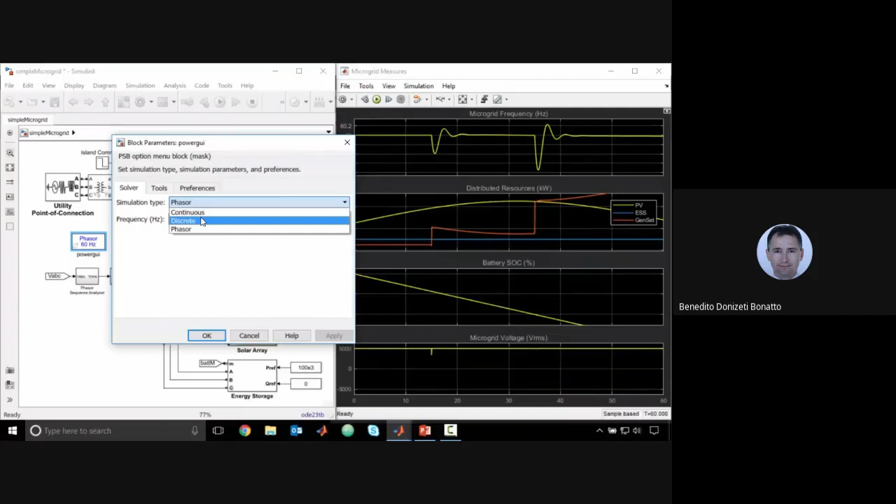So I'll go ahead and select discrete, and I'll go ahead and comment out that phasor sequence analyzer. We don't need that anymore. All that had is just some complex math to break apart a phasor. And I'm going to run this simulation again.

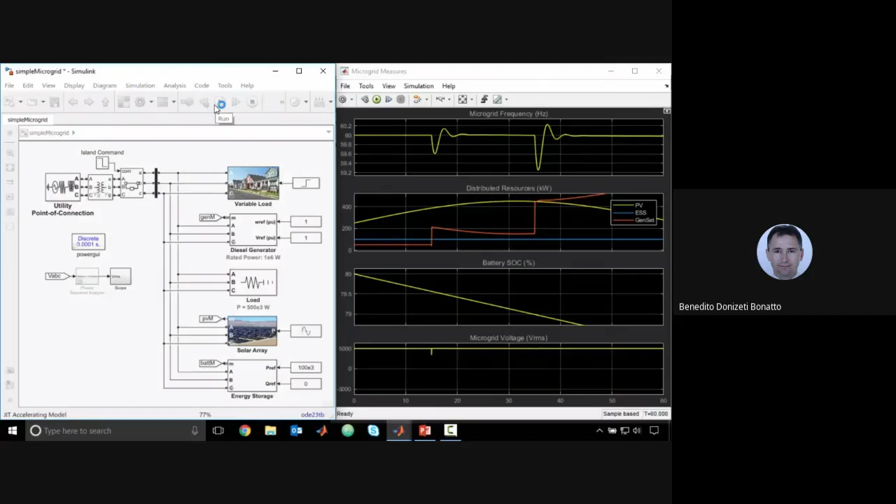So we're subjecting the simulation to the exact same disturbances. We're still going to island this microgrid at 15 seconds, still going to have that same step at 35 seconds. But you'll already notice there's a significant difference here in our voltage output. The voltage here, we're actually simulating those full three-phase AC waveforms. So you have the choice, depending on the simulations that you need to conduct, what style of simulation makes the most sense for your applications.

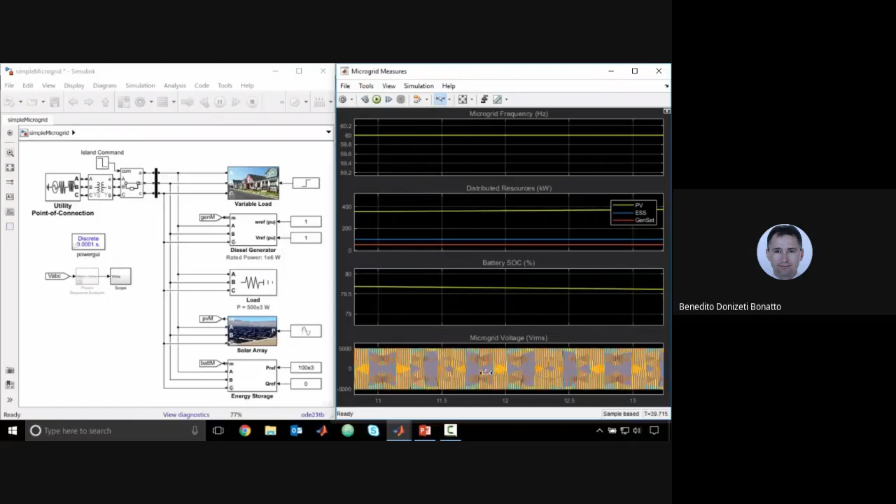So it really depends on the level of fidelity that you need for your simulation on which method to choose. For large-scale distribution feeders, I'd recommend phasor, but if you have smart grid applications or renewables, you may end up needing a full electromagnetic transient simulation. One thing to keep in mind about phasor simulation is that as you drift away from the nominal frequency of the circuit, so 60 hertz or 50 hertz, the phasor approximation will get less accurate, and so it's recommended maybe switch to EMT if you expect large frequency swings.

So I often get asked, is it possible to combine both phasor and EMT in a single simulation? And this often comes up because if you have a large distribution feeder that you're integrating in an energy storage system or a solar array, you may have a high fidelity model of the renewable aspect, but you want to keep a low fidelity or phasor approximation of the large scale distribution network, so you don't have to increase computational complexity. And the short answer is it is possible.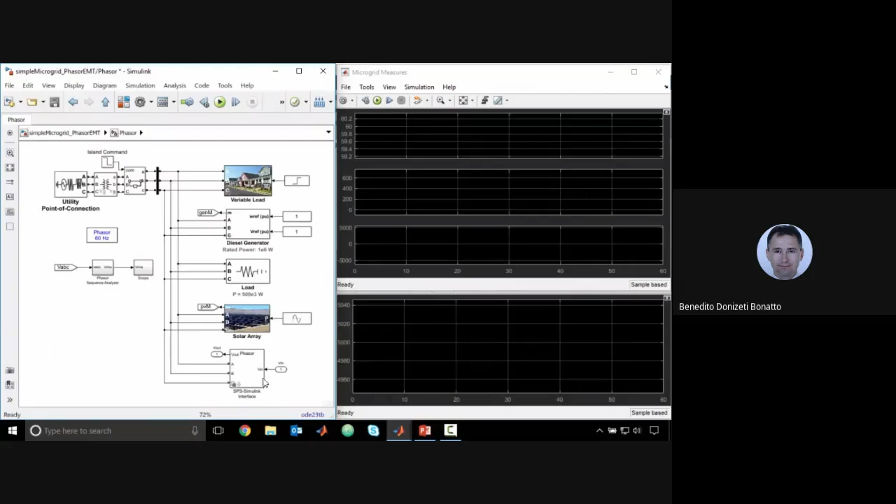The energy storage system in this case is being simulated as full EMT. And so we can start to scale the simulation up and have a higher complexity in this system while still maintaining lower complexity here. So if I push play, we can start to see this simulation in action. Now as the simulation runs, we'll see the same type of results up here on the microgrid frequency, the distributed resource allocation, the battery state of charge.

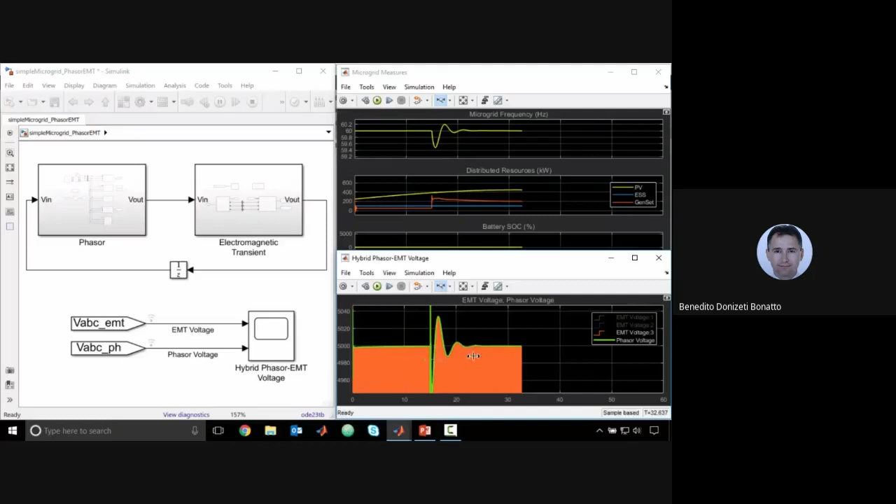The main difference here is you'll notice that we have two plots superimposed, the electromagnetic transient voltage and the phasor voltage. So phasor voltage here in green and then the EMT voltage here in red. I'm going to go ahead and pause this simulation and zoom in so we can take a closer look. Zoom in close enough, we'll see that we've got the EMT aspect coupled in with the phasor aspect of this simulation. So this lets us start to scale these simulations up.

Now, for really large scale simulations, this becomes very advantageous because we can start to segment a network into multiple parts and have portions of this network as EMT and portions as phasor. And so here's an example that we've done of an IEEE 123 node network where we've taken a subsection of that and run that as an EMT and then kept everything else as phasor. So this opens the door for many things, including multi-core simulations for real-time systems.

Now that we've seen how we can use Simulink and Simscape Power Systems for modeling and simulation of microgrids and renewable applications, let's see how we can migrate these desktop simulations to a real-time simulation. Now, real-time simulations become particularly important once we want to start working with hardware and start performing grid integration studies.

So after we've performed our desktop simulations and confirmed that our simulations are giving us the expected outputs, we need to make two changes to our Simulink configuration settings, and those are accessible through this gear here.

The first of these two settings we need to change is the solver. For desktop simulation we can use any solver we want, but for real time we need to choose a fixed step solver. This is because a real-time platform executes at a fixed clock cycle that we want to specify, choosing the fastest clock cycle we expect. In this case we're choosing fixed step at 100 microseconds.

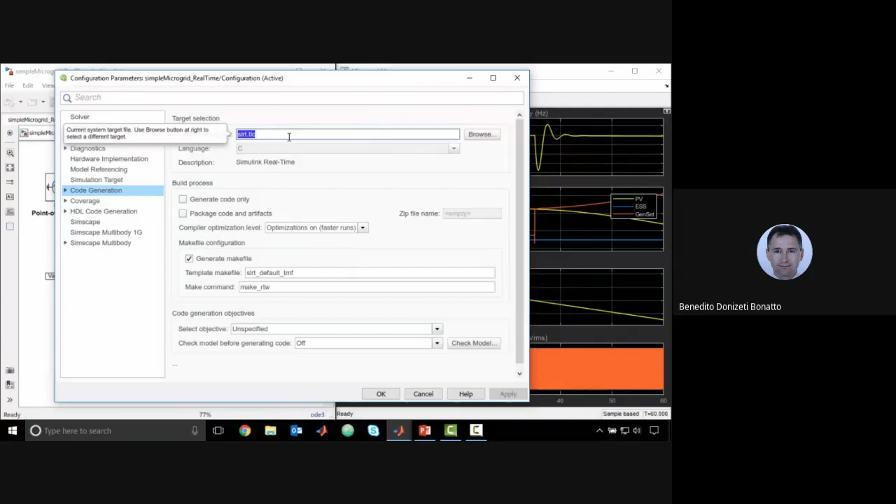The other change we want to make is under code generation, to the system target file, or basically the code generation target. The reason we want to make this change is because Simulink by default generates generic C code for generic applications. Since we know we have a particular target, in this case a Speedgoat which runs using Simulink Real-Time, we can generate optimized C code that gets compiled to an application that can be used by this system.

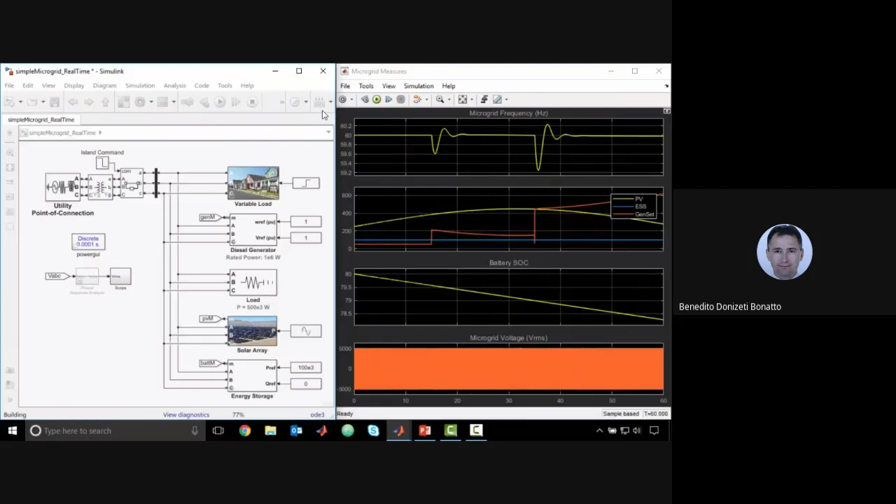Once we've made those two changes, we can come back to our Simulink canvas, and just to push this to the real-time target, we can hit the build button. This build button is going to convert the Simulink model into C code and then push it to the real-time platform.

As this is going on, I'll open up the diagnostics. This shows us the code generation process. Now in this particular case, I'm just pushing the pure simulation to the real-time platform. For a lot of applications where you're working with hardware, you'll need to make an additional change to the Simulink diagram, and that would be adding the driver blocks associated to the particular protocols or IOs you're using, so Modbus, Profinet, and so forth.

In this particular case, the other change I did make is under scopes. I added some target scopes that we'll see in a second.

Now I'm going to go over to the Simulink Real-Time Explorer. This lets us interact with any targets we have connected up to our host machine. In this particular case we have this one here, and we can see our application is now loaded onto this machine automatically after I built it. I'm going to go ahead and hit start. Now this is actually running the real-time simulation.

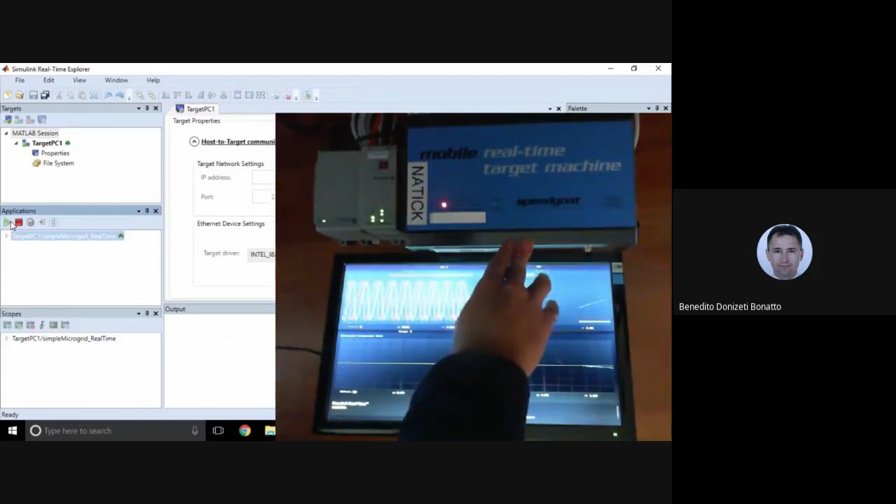If we change our attention over here to our webcam, we'll see we have a scope displaying the current simulation results. But right over here, this is actually the Speedgoat we're using. This Speedgoat is now running this simulation. So that dynamic simulation I put together, the electromagnetic transient simulation, is now running in real time on this machine.

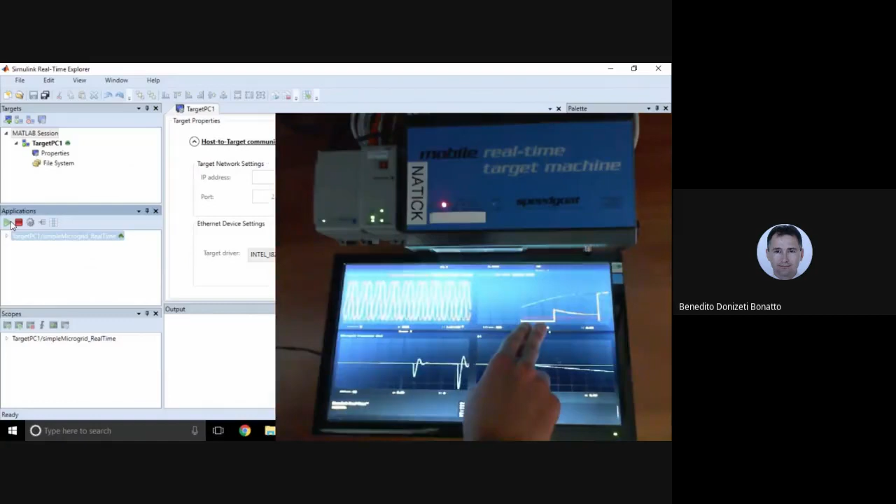What we'll also see is the results here. In this top scope we'll see the three-phase voltage waveform, this is the microgrid voltage, confirming that we are running the electromagnetic transient simulation. We can also see the distributed energy resources, the power produced by each one, so the solar trace, the diesel genset trace, and the energy storage trace. Finally, we can see the two frequency swings as a result of the microgrid events we previously programmed.

So as you could see, really the main changes were on the solver and selecting the correct real-time target. Now like I mentioned, there are other changes you can make, but you can see that it's fairly straightforward to go ahead and push a simulation you have straight to a real-time platform.

So to quickly recap, we've seen how we can build up models of microgrids and distributed energy systems using Simscape Power Systems. These models are flexible in the sense that we can choose the level of fidelity that works for us, be it phasor level fidelity or EMT level fidelity. We can have power electronics, or we can choose not to have power electronics. And we can also hierarchically build these models up, meaning we can group things together in subsystems and customize components so we can share them in our own libraries once we've confirmed the models match what we expect.

And then finally, we've seen how we can push these models to real time using a couple of changes to the model, getting it directly into a real-time target within a few minutes. As I mentioned at the beginning of this video, the model is the foundation we're going to use for a lot of the other topics we want to touch.

So building these models, now we can use data to do validation of the models. Or if we want to build an energy management system, we now have a plant that we can test and conduct scenarios with. And finally, if we want to test grid codes, we can use these models coupled with their control systems to see, is this system performing low voltage ride-through as we expect?